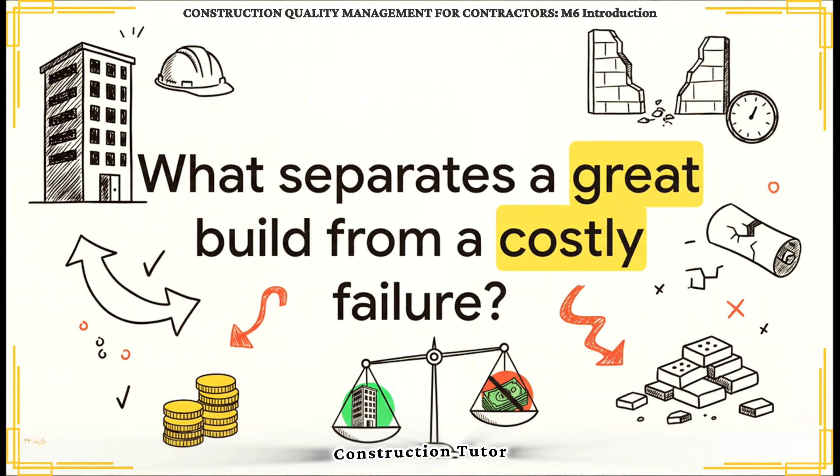So let's kick things off with a huge question. What is it that really separates a smooth, successful build from one that's just a mess of delays, blown budgets, and endless rework? Is it just getting lucky? Having better tools? No, not at all.

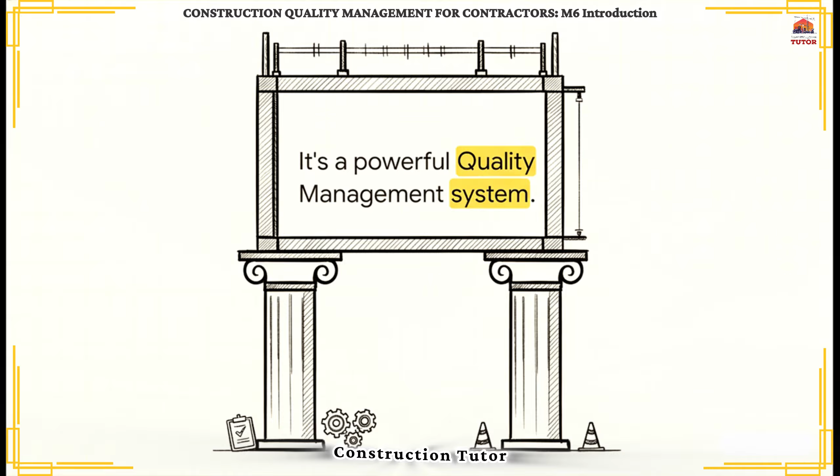The secret sauce is a powerful quality management system. Think of it like the project skeleton. It's this invisible framework that makes sure everything holds together, and it's built on the two pillars we're about to break down.

Okay, first up, let's talk about quality assurance, or QA. I want you to think of QA as the project's oversight, kind of like the view from 30,000 feet. It's all about looking at the big picture to make sure the entire system for quality is actually working the way it should.

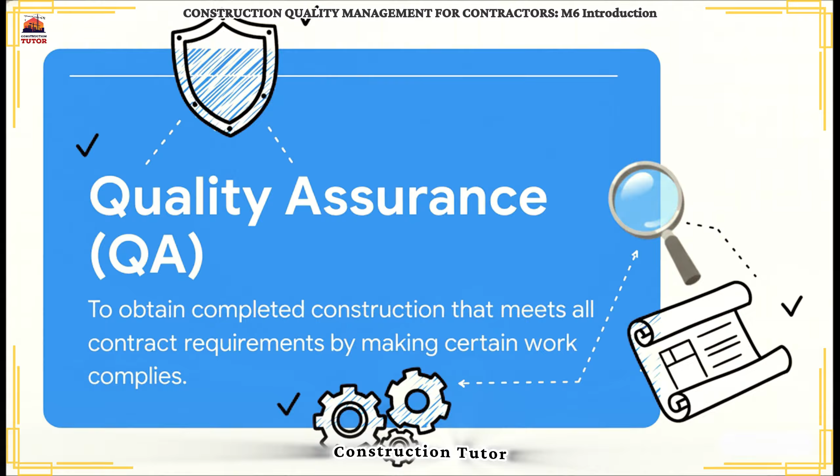Let's look at the official definition for a sec. QA's main job is to get a finished building that meets every single contract requirement. And the key phrase here, the one to really remember, is making certain. QA is all about giving everyone that confidence that the system itself is designed to produce quality.

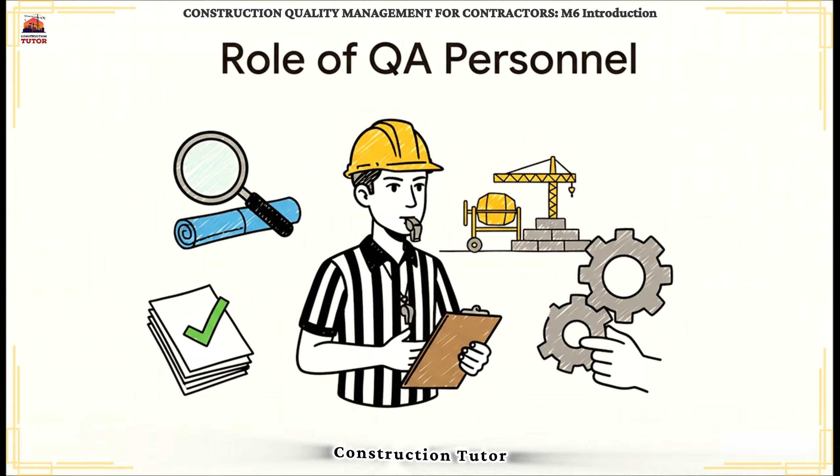So who actually does this? Well, QA personnel are basically the referees of the project. They aren't on the field playing the game, right? But they are watching closely to make sure the rules, that's the contract, are being followed. They look at the contractor's methods, they review their paperwork, and if they spot a problem, they make sure the contractor fixes their process so it doesn't happen again.

Now, let's get to our second pillar. If QA is the referee, then Contractor Quality Control, or CQC, is the team's actual game plan. This is the hands-on, boots-on-the-ground part of the whole thing.

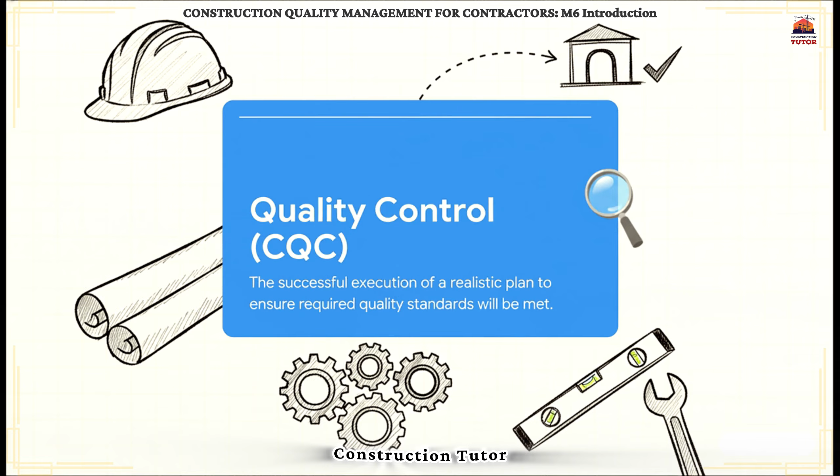And here's the most important part. CQC is the contractor's own responsibility. It is their plan, their procedures for managing their own people and their subs to make sure the work they actually produce is up to snuff. It's all about the execution.

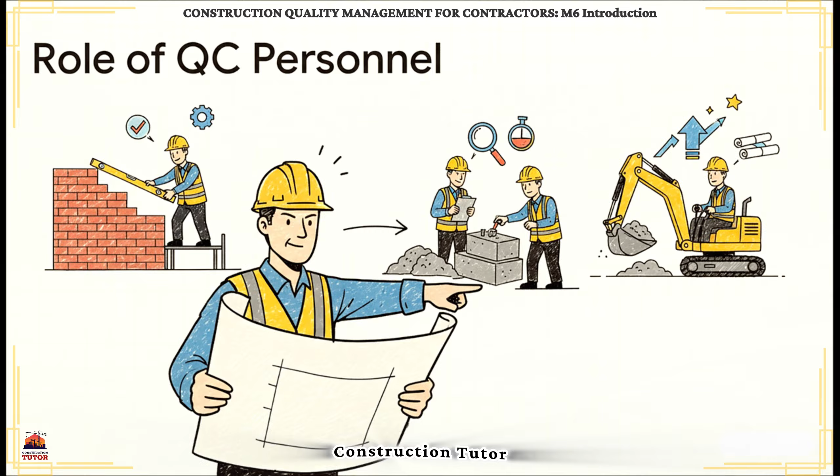This means the QC folks are both the coach and the players on the field. They're the ones doing the quality work, running tests on concrete, documenting every single thing, and just keeping a sharp eye on the workmanship to make sure every job is done right.

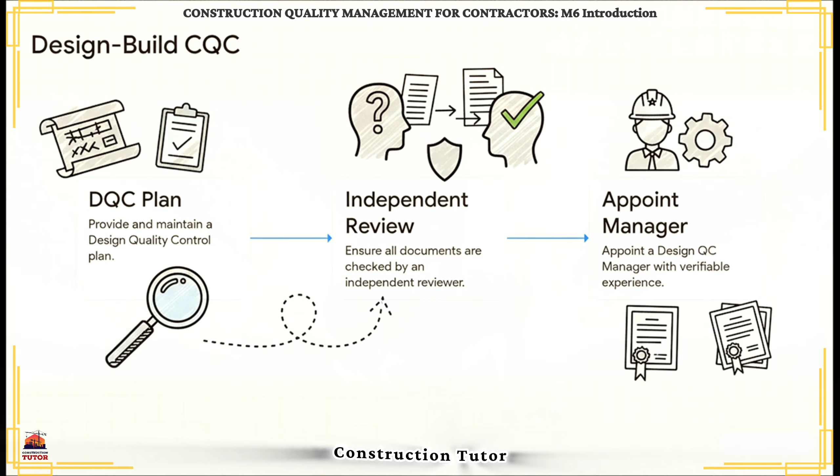Now things get a little more specific when we talk about design-build jobs. Because the contractor is also doing the design, their CQC plan needs another layer. It absolutely must include a design QC plan, and, this part is critical, all the design documents have to be checked by an independent reviewer. You can't grade your own homework, right?

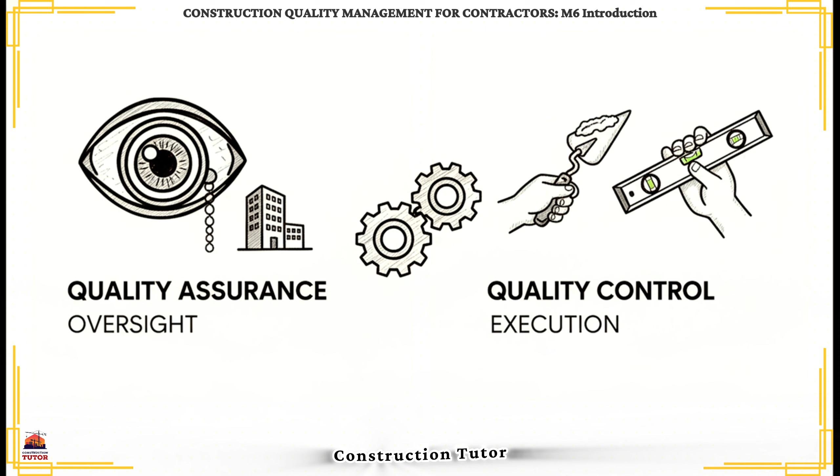Same idea here. So let's put it all together. See how they fit? QA assures compliance from an oversight role, making certain the work will be good. CQC executes the plan from a management role, controlling the activities to make the work good. They're two totally different functions, but they have to work together like a well-oiled machine for the whole system to succeed.

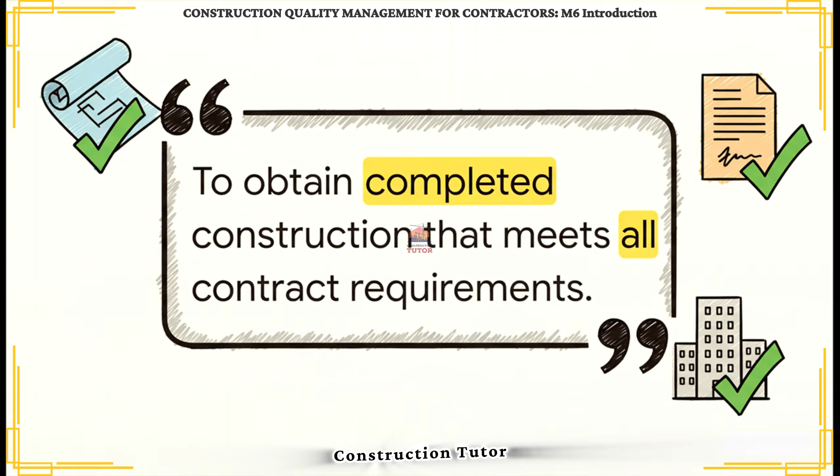All right, we've covered a lot of ground. So to make sure this all really sinks in, let's do a quick pop quiz based on exercise 6.1 from our source material. You ready? First one up, what's the main job, the number one function of quality assurance? That's it. It's to make sure that the final, finished project checks off every single box in that contract.

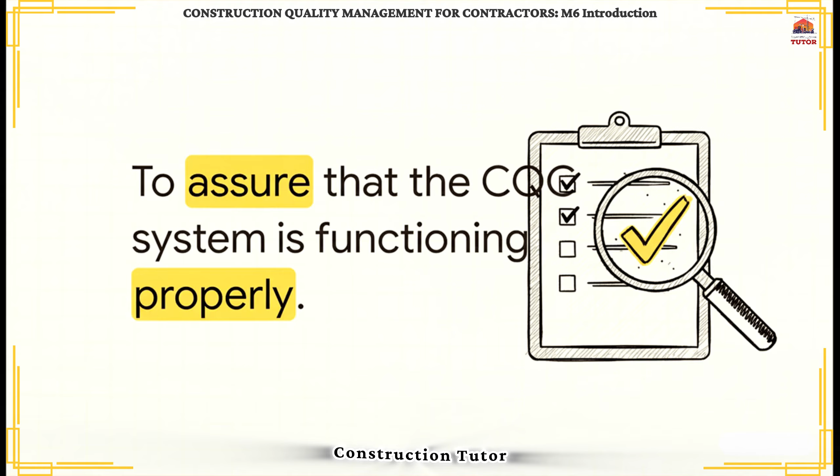Okay, next up, what's the specific role of the QA team on a project? What are they there for? Exactly. They're there to make sure the contractor's own quality control system is actually working. They're the check on the checkers.

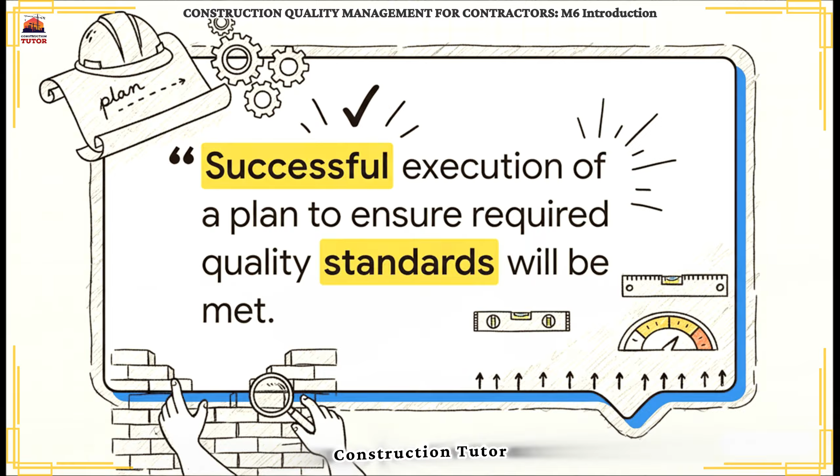All right, let's flip it around. What's the main purpose of Contractor Quality Control? You got it. CQC is all about the successful execution of the contractor's own plan to hit those quality standards. It's the action, the doing part.

And who's doing all this doing? What are the main jobs of the QC personnel? That's right. They're responsible for pretty much the whole shebang, producing the quality work, running tests, and keeping a super detailed paper trail of everything that happens.

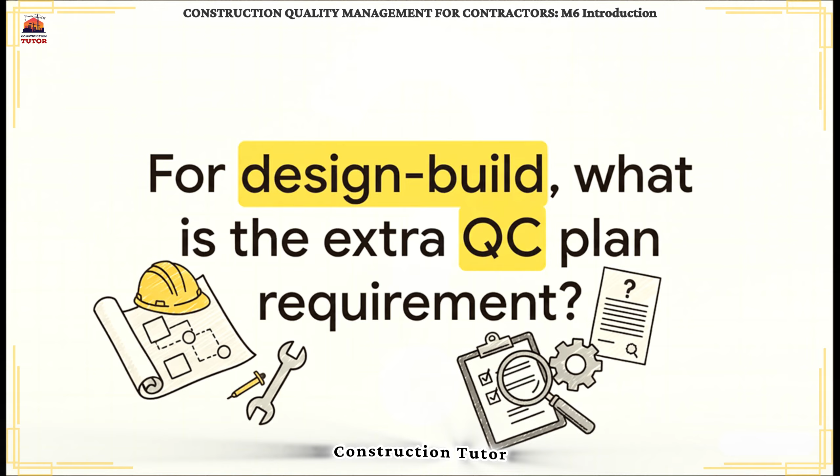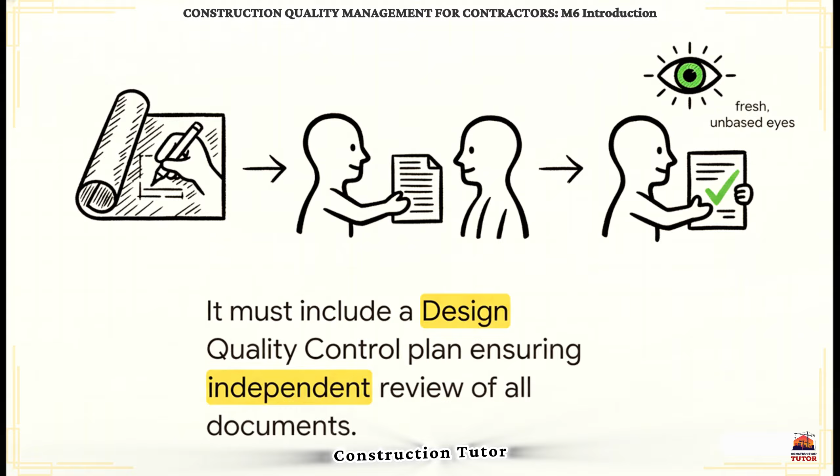Okay, last question. This one's a bit more specific. For those design-build contracts, what's that extra thing that has to be in the QC plan? That's the one. It needs that special design quality control plan. And the heart of that plan is the independent review of all the documents. You just gotta have that second set of eyes.